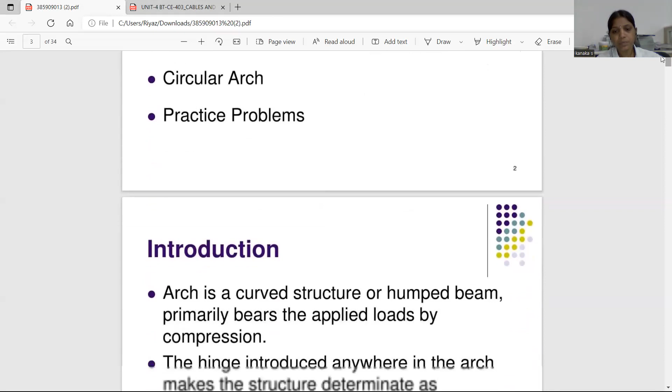First of all, arches definitions. What is meant by arches? An arch is a curved structure or humped beam.

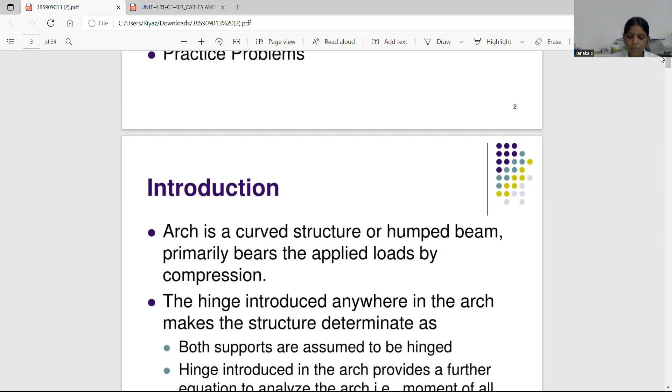Primarily, arches carry the applied loads by compression. A hinge introduced anywhere in the arch makes the structure determinate: first, both supports are assumed to be hinged, and then a hinge introduced to the arch provides a further equation to analyze the arch. That is, the moment of all forces about the hinge is equal to zero.

This is the introduction of the arches.

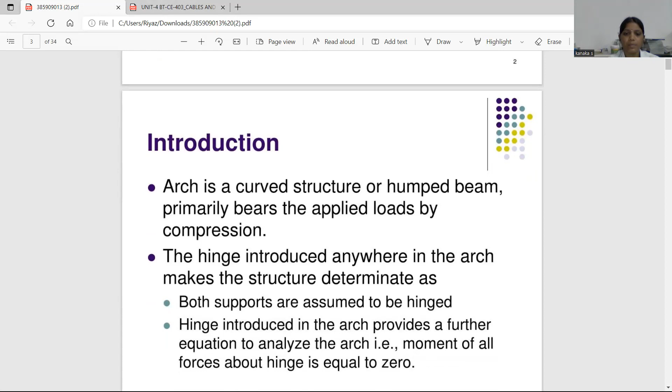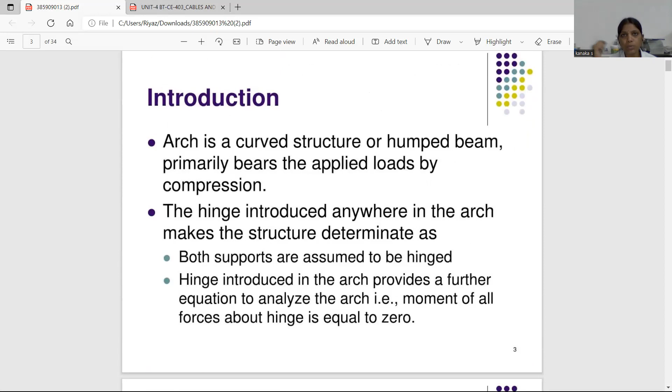So again, an arch is a curved structure or humped beam that carries applied loads by compression. First condition: both supports are assumed to be hinged. Second: a hinge introduced in the arch provides a further equation to analyze the structure. So the moment of all forces about the hinge is equal to zero.

Normally, the third hinge is introduced at the topmost point on the arch curve, known as the crown. So this point is the crown, hinge at crown.

This height is YC, the rise. A and B are the distance of the length of the span.

So this is the parabolic arch. This is the first hinge, this is the second hinge, and the center point is a hinge formed where the hinge is introduced at the crown.

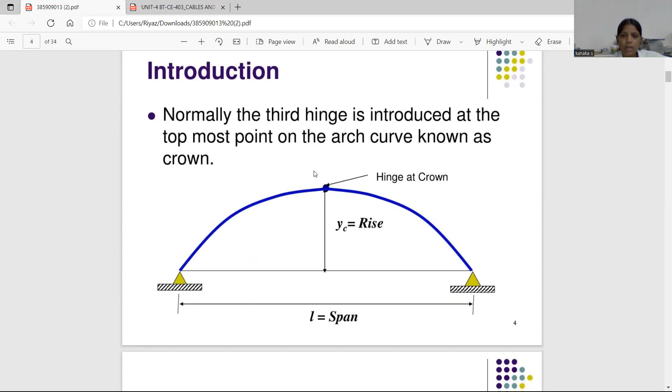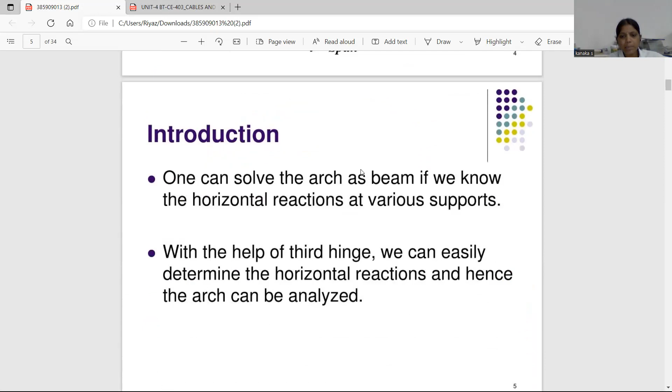Next, one can solve the arch as beam if we know the horizontal reaction at the various supports. With the help of the third hinge, we can easily determine the horizontal reaction, and hence the arch can be analyzed.

So arch formulas follow in the next slide. Consider an arch A, C, B hinged at A, B and C. L is the horizontal span and YC is the central rise. This is shown in the figure.

See the figure: arch A, C, B hinged at A, B and C. L is the horizontal span and YC is the central rise.

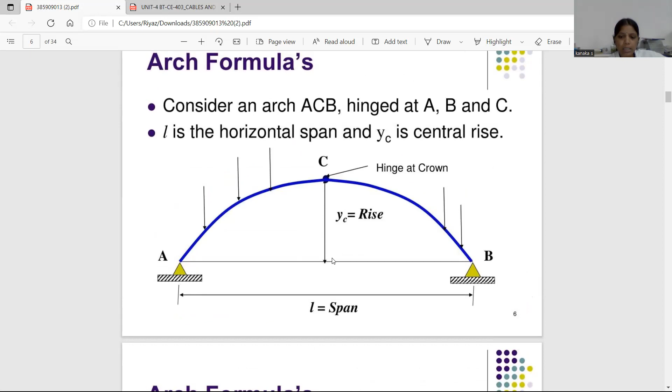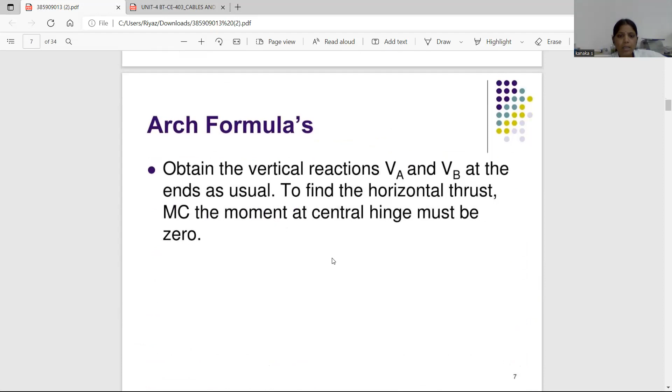Arch formulas: obtain the vertical reactions VA and VB at the ends as usual, then find the horizontal thrust. The moment at C, or the moment at the central hinge, must be zero. General derivation to find H: the moment at C, MC, the moment at the central hinge, must be zero.

So MC equals mu C plus H into YC equals zero. So the horizontal thrust H equals minus mu C divided by YC. This is the first equation.

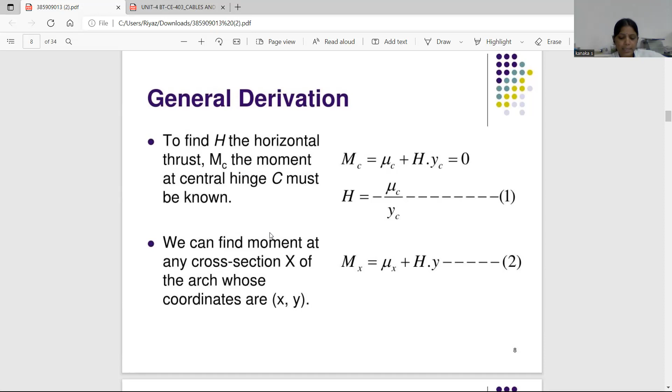Second, we can find the moment at any cross section X of the arch whose coordinates are x and y: Mx equals mu x plus H into y. This is the second equation.

Next, the vertical and horizontal actions at the section, considering the portion of arc AX. The vertical reaction can be found by the vertical shear at the section, as in a straight horizontal beam: V equals VA minus W1 minus W2. This gives the vertical force.

The horizontal thrust at both ends is the same, so H equals H.

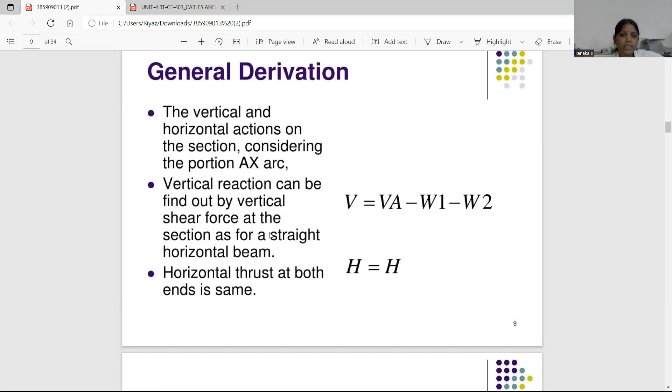This is formed from A to C, or A, forming the angle theta with the horizontal force and the vertical force, W1 and W2. The rise is Y, the central rise is YC, and X is the distance corresponding to Y.

So P equals H cos theta plus V sin theta, and the force F equals H sin theta minus V cos theta.

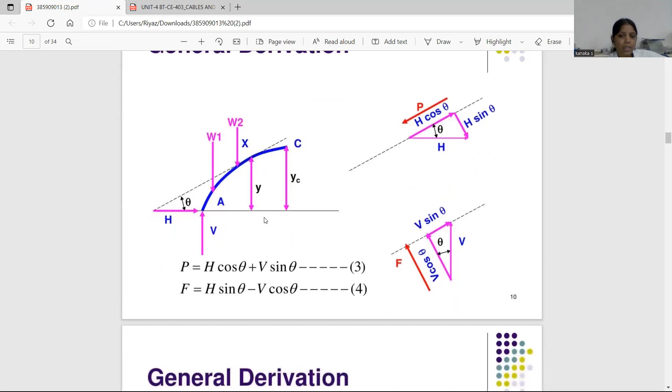Next, draw the tangent at X to the center line of the arch, and let it incline to the horizontal at angle theta. So P equals H cos theta plus V sin theta, and force F equals H sin theta minus V cos theta.

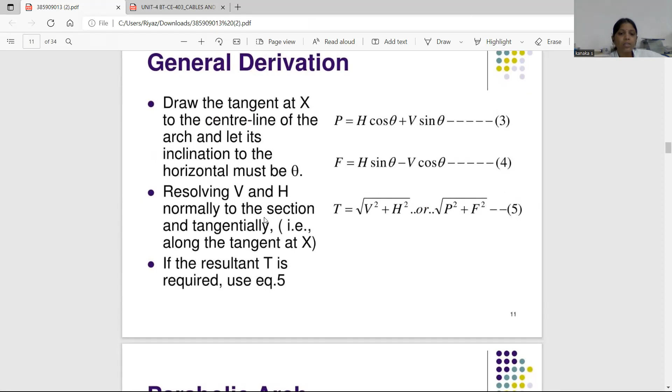Resolving V and H normal to the section and tangentially along the tangent at X, T equals the square root of V squared plus H squared, or the square root of P squared plus F squared. So the resultant T is obtained using equation 5.

So, first one is the parabolic arch. If the three-hinged arch is parabolic in shape and it carries a uniformly distributed load over the entire span...

Every action of the arch will be pure in compression. Resisting only a normal thrust. There will be no shear force nor bending moment at this section.

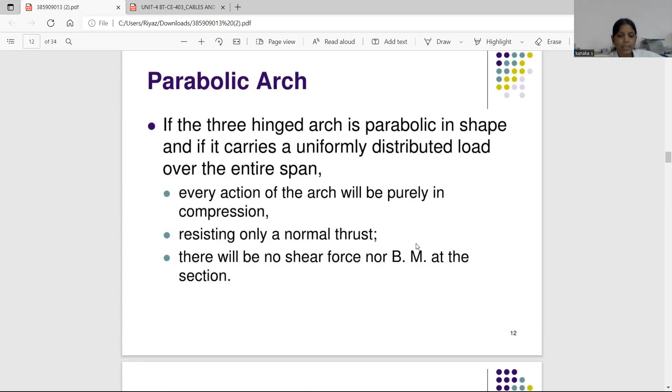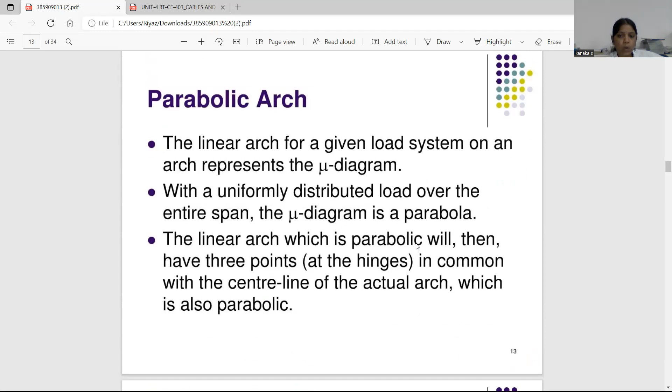So parabolic arches, linear arches. The linear arches for a given load system on an arch represent the bending moment diagram. With a uniformly distributed load over the entire span, the moment diagram is a parabola. The linear arch, which is parabolic, will then have 3 points at the hinges in common with the center line of the actual arch, which is also parabolic. The linear arch will then be identical with the actual arch. To obtain the bending moment, it will be necessary to calculate the rise at any section of the arches.

So next, for any other loading on parabolic arches, there will be three straining actions: P, F, and M at any section.

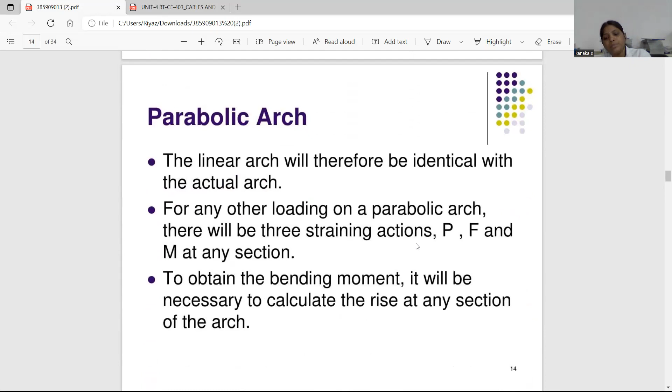So y equal to lambda times x into (L minus x). Lambda is a constant. At x equal to L by 2, y equal to yc. So yc equal to lambda into (L by 2)(L minus L by 2), which is L by 2. So lambda equal to 4yc divided by L squared.

Substitute the value of lambda, so y equal to (4yc divided by L squared) times x into (L minus x). It may also be noted that at the quarter points, where x equal to L by 4, the rise is 3 by 4 yc.

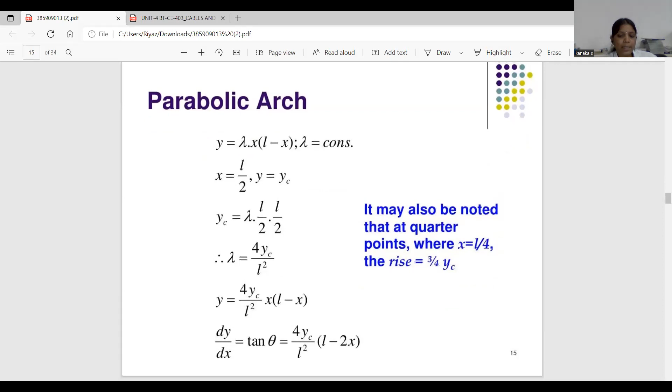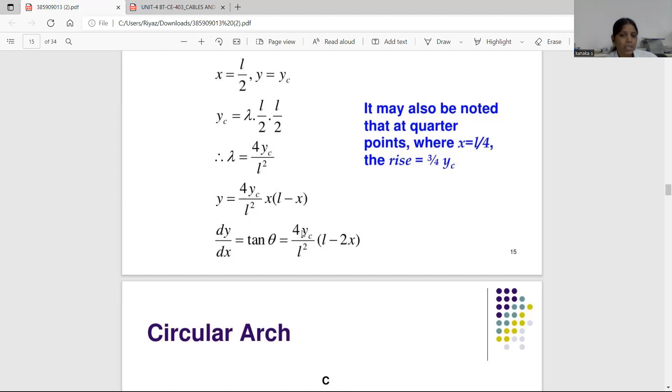The value of dy by dx equal to tan theta, which is 4yc divided by L squared times x into (L minus x), differentiated with respect to x. Differentiating x square gives 2x, so substituting these values gives L minus 2x. So dy by dx, tan theta, equal to 4yc divided by L squared into (L minus 2x).

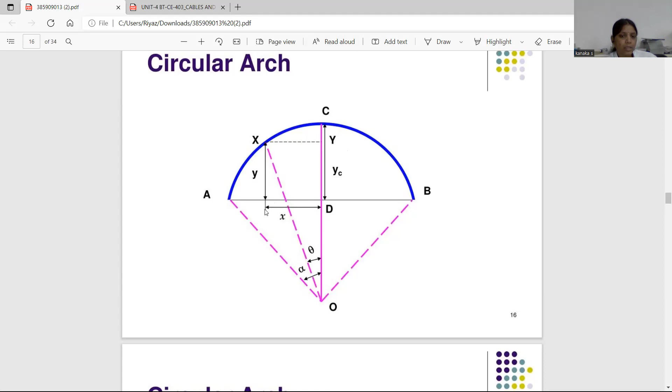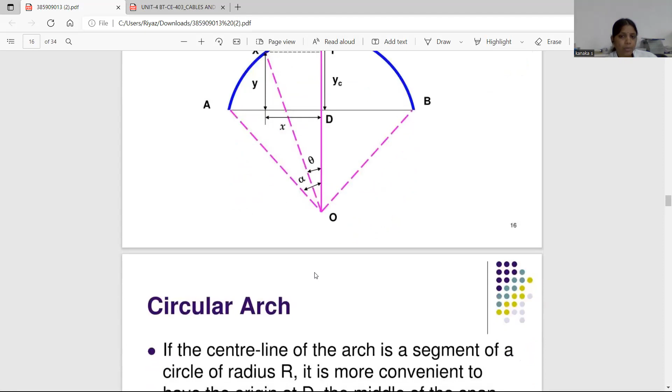Next is circular arches, A and B arches, with radius shown, and central point O. The central rise is YC, with vertical and horizontal distances x and y, and angles theta and alpha. This is formed to the circular arches, where the center line of the arch is a segment of a circle of radius R. It is more convenient to have the origin at D, the middle of the span.

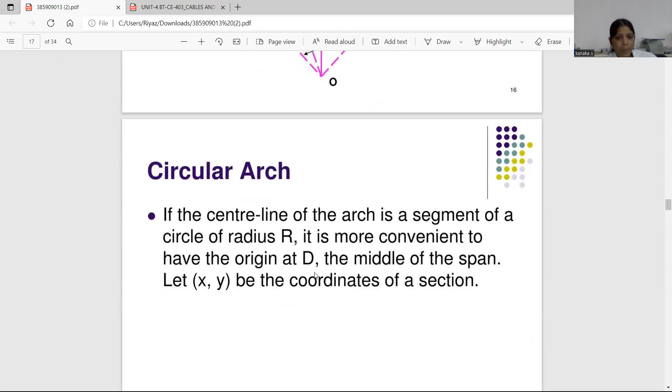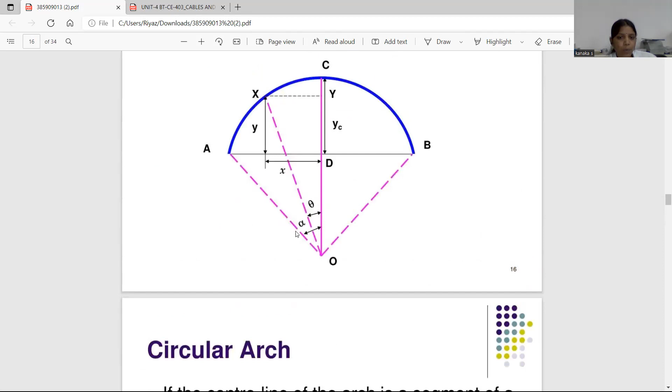Let x, y be the coordinates of the section. AO and OB, the arch radius, equal R, while AD and DB equal L by 2, and DC equal YC. So OY equal OD plus DY, where OD means R minus YC, and dy is plus y, so xy is equal to x. So OX squared equal to OY squared plus XY squared: R squared equal to x squared plus (R minus YC plus y) whole square. So yc into (2R minus yc) equal to L squared divided by 4.

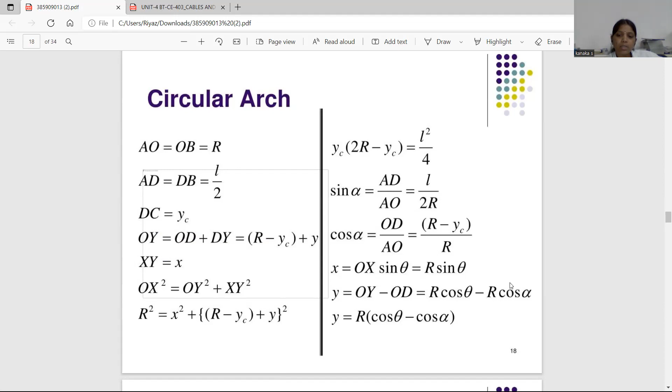So sin alpha equal to AD divided by AO, where AD means L by 2 and AO equals R. So cos alpha equal to OD divided by AO, where OD means (R minus YC) divided by R. So x equal to OX sin theta, which is R sin theta. Y equal to OY minus OD, equal to R cos theta minus R cos alpha. Taking R as common, y equal to R into (cos theta minus cos alpha).

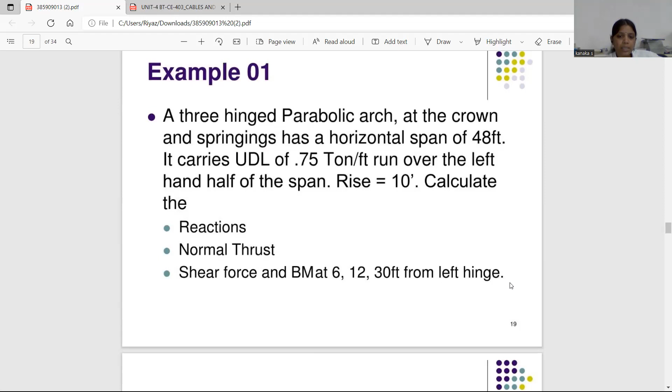Example sum: a three-hinged parabolic arch hinged at the crown and the springing has a horizontal span of 48 feet. It carries a uniformly distributed load of 0.75 ton per foot run over the left hand half of the span, with a rise of 10 feet. Calculate the reaction, normal thrust, and shear force and bending moment at 6, 12, and 30 feet from the left hinge.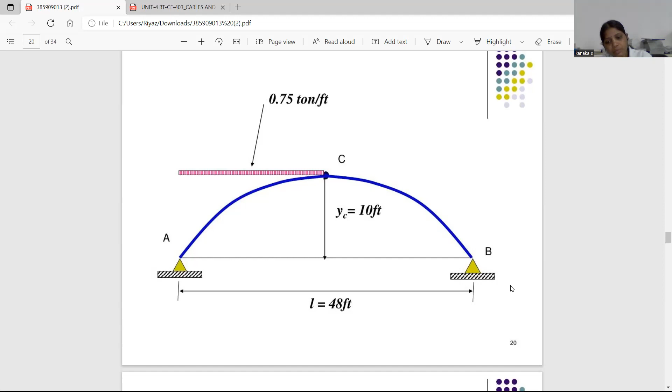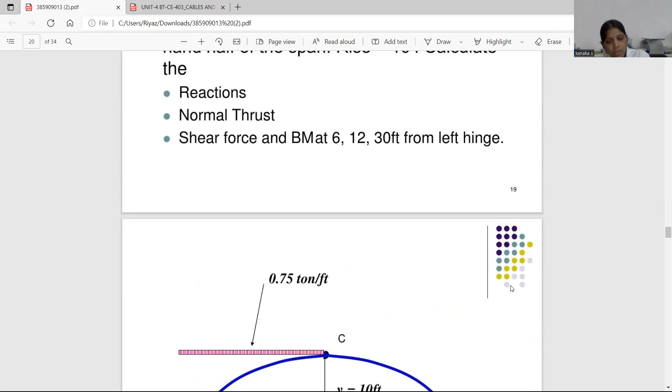This is the length of the span, 48 feet. The central rise YC equal to 10 feet. The UDL load is 0.75 ton per foot over half the span. This is the parabolic arch. So we find the reactions, normal thrust, shear force, and bending moment of the section at 6, 12, and 30 feet from the left hinge.

So VA equal to, taking moments about A equal to 0. So VB into total distance 48 feet, minus load into distance divided by 2.

Next, vertical force is equal to 0. So vertical force VA plus VB equal to 0.75 into 24. Find out the values of VA equal to 13.5 ton.

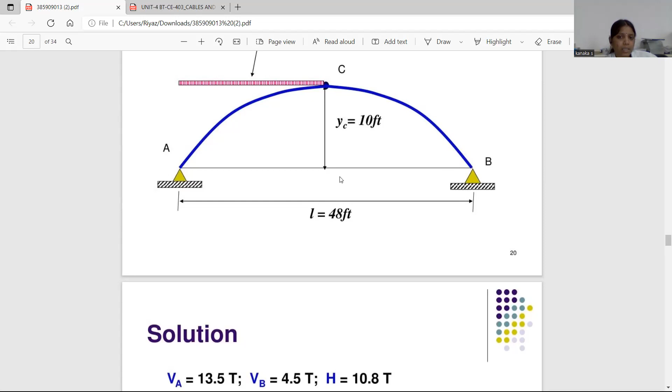So horizontal thrust H, moment about C equal to 0. Taking the values at this point, VB into 24 minus H into YC equal to 0. So find out H is 10.8 ton.

So Y equal to the parabolic equation, Y equal to 5 divided by 288x into 48x, 48 minus x. Theta equal to 5 divided by 288 into 48 minus 2x, L minus 2x, L minus x.

So find the values of x equal to 6, 12, 30. Substitute the values of x equal to 6, y equal to 5 divided by 288 into x into 48 minus x. Substitute the values of x equal to 6, find out the values of y, 4.375.

So similarly, find out the values of theta. For x equal to 0 and 6 feet, substitute the values, theta equal to 32 degrees.

And then for x equal to 12 feet, substitute the values and find out y equal to 7.5. Similarly, theta equal to 22 degree 37 minutes.

So for x equal to 30 feet, find out the values of y equal to 9.66 and theta equal to 11 degree 46 minutes.

So cos theta values are 0.848, 0.923, 0.979. Sin theta equal to 0.529, 0.348, 0.203.

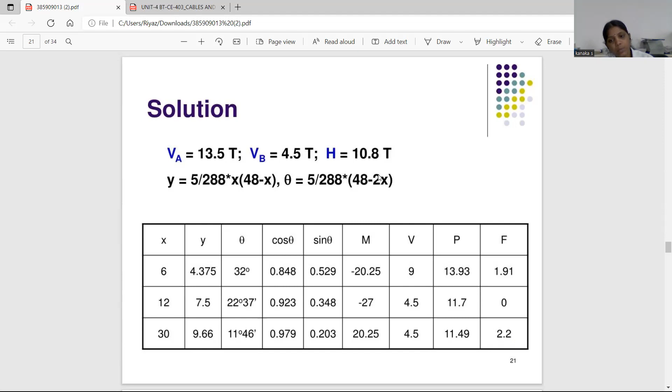The circular arches of span 80 feet with a central rise 16 feet. It's hinged at the crown and supports carry a point load of 10 tons, 20 feet from the left support. So find out the values of reaction, normal thrust, maximum and minimum bending moment.

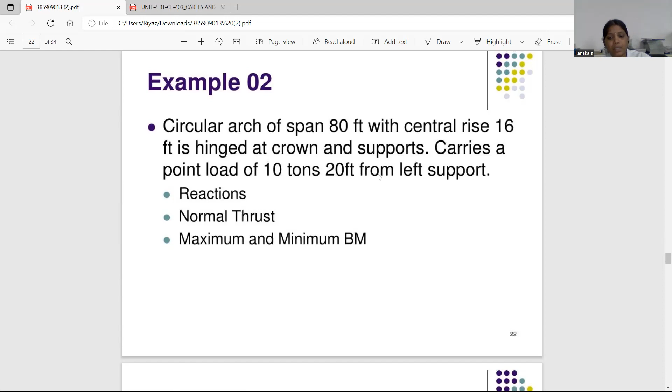So this is the circular arches. Find out the values. Already found out the vertical reactions VA and VB. Horizontal thrust H is found out.

So Y is changed for the parabolic arches and circular arches. Already Y equal to 4yc divided by L squared, x into L minus x, and for the parabolic equations.

So for circular arches, YC into 2r minus YC equal to L squared divided by 4. R means r equal to, r square equal to x square plus y plus r minus yc whole square. So this is the central circular arches.

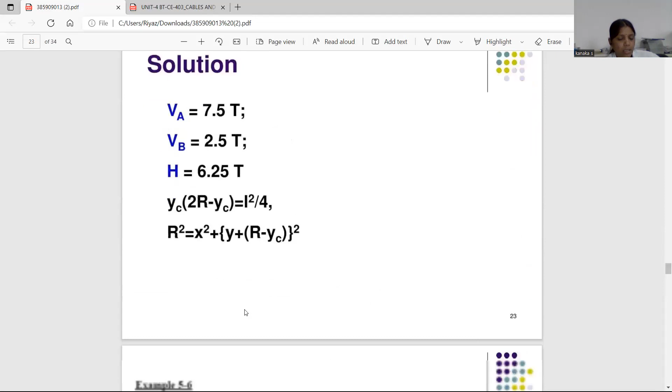So this is the three-hinged open-spandrel arches, examples of bridges.

So in the figure below there is a parabolic shape and supports uniform loads. The parabolic arches are subject to only axial compression at intermediate point D along its axis. The assumed loads are uniformly transmitted to the arch ribs, overall UDL over the entire span is 7 kN per meter.

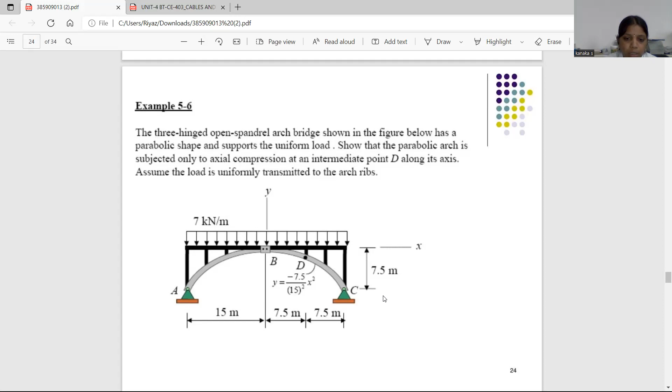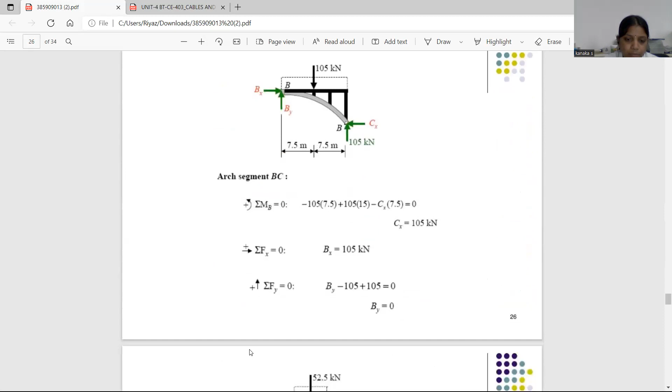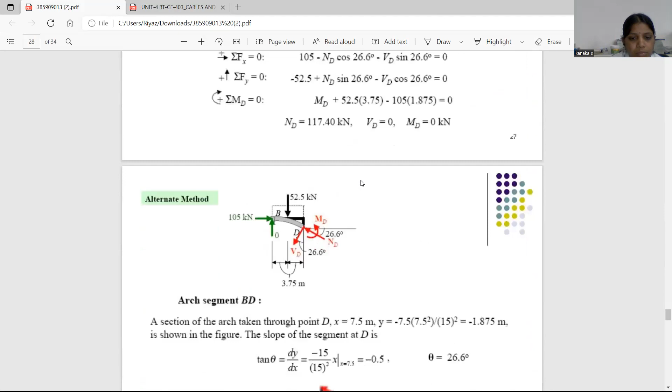So finally the values of ND, VD, MD, find out the values of a segment at BD. A section of the arch is taken through the points D, and x equal to 7.5 meter, y equal to minus 7.5 into 7.5 squared divided by 15 squared, equal to find out the values of minus 1.875 meter.

So the final value of the slope of the segment, tan theta equal to dy by dx, minus 15 divided by 15 squared into x, x equal to 7.5 meter. Substitute the values, minus 0.5, theta equal to 26.6.

So finally the values of normal thrust and reaction, vertical reaction VD, the horizontal thrust H. So normal thrust under reaction, find out the values of vertical thrust, ND and VD. So final moment MD equal to 0 kilonewton.

This is the examples of the parabolic arches and the circular arches. Thank you.